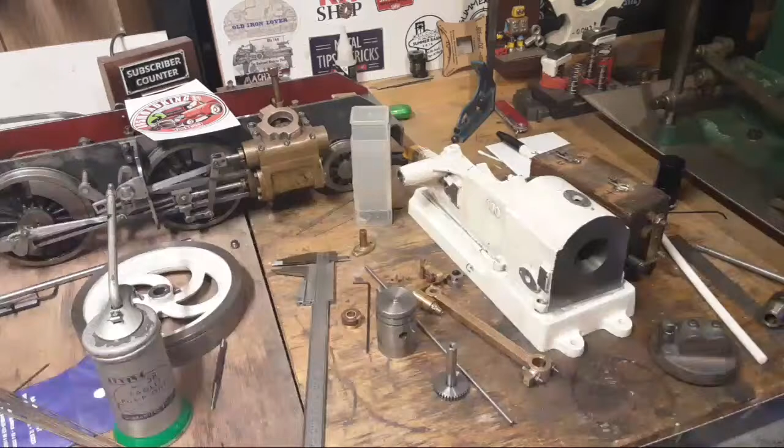Hey guys. Gosh, mixed crowd here.

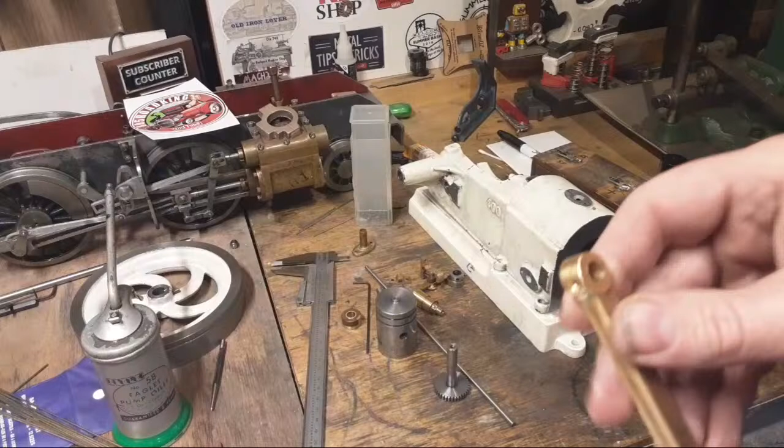Don't need a new conrod, no, probably need a new bush, that's about where we're at with that. Conrod should be fine, probably going to put a new bush in it. Joseph asks about the bush turning - that's a really good question. It's going to have a bit thicker bush than it's got here at the moment. So when it does, we're going to put a set screw in from the back here, just to lock it in place to stop it turning, I think, and locate it the same place every time and stop it moving sideways. So that's what I'm probably going to do, is put a set screw in there. This has got an oil hole in it this week, in the little end or the gudgeon.

And the new pin - the pin's finished. I actually made a pin which has got Teflon ends, one each end, to stop them marking if it does float, which I don't think it will, it's a pretty good fit in the piston, but if it does float, it'll stop it marking the bore on each end. So that's all we're going to do for wrist pin retention, I think, at this point.

Now this hole's oiled or lubricated through this one. It's got a hole in the top of the piston here which wipes past the hole for the oiler. It does actually line up, which I'm a little bit impressed about, but if you can see, in underneath there, as it wipes that should oil this, and it seems to work okay, so I'm fairly happy with that. That's where we're at with the state of play, really.

How did I do the Teflon ends? They're pressed in. This is just a bit of O1 or silver steel, and I machined each end and drilled it, then made Teflon ends a fraction oversized so they pressed in really nice and tight. Basically all I did was machine them down to a radius on the end, and I think they'll be plenty good.

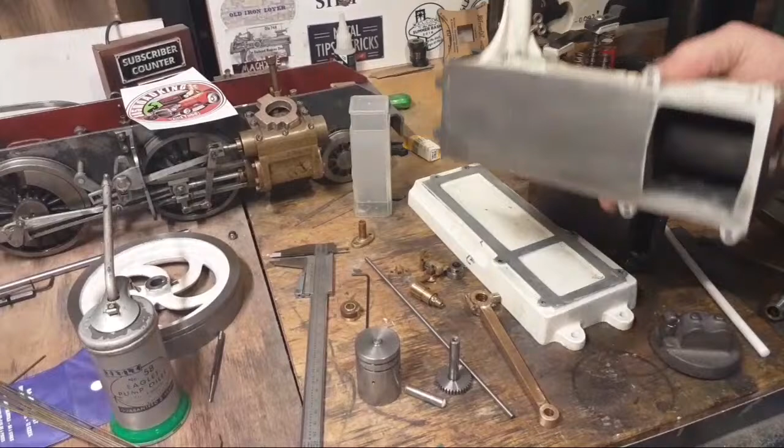There's the water jacket underneath for anyone who hasn't seen that. There's a water jacket hole there and a water jacket hole in the top, so there's pipes at the top which are going to go to a little radiator, I think, of some sort. This is solid all the way through here - I'm not sure if that was apparent to most people, but this is solid.

On this side we've got the crank and the bearing for the crank, which is straight in the cast iron, and the bearing for the cam, also straight in the cast iron. And we've got two points here, which is where the push rod mounts.

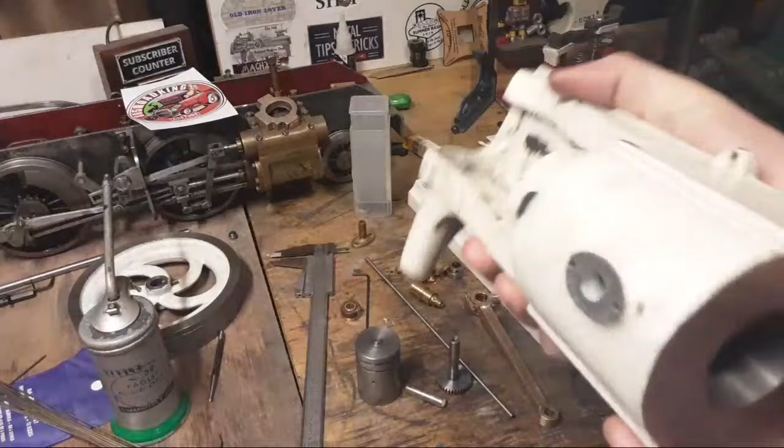This one's for the oiler up here. And if we have a look, there's the bore, which I'm pretty happy about, really. There's some oil streaks in there - I don't think it's actually scratches, I'm hoping it's not scratches. But I think it's just oil streaks there.

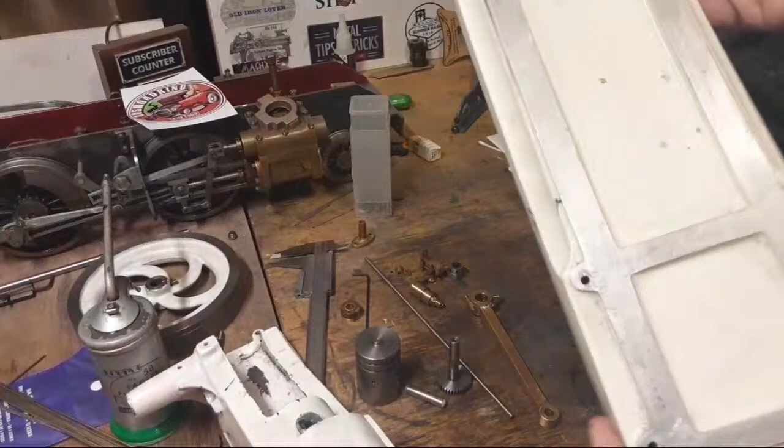That all sits on this casting, which is aluminium, because I couldn't be bothered shipping an iron one across, and I did this locally here.

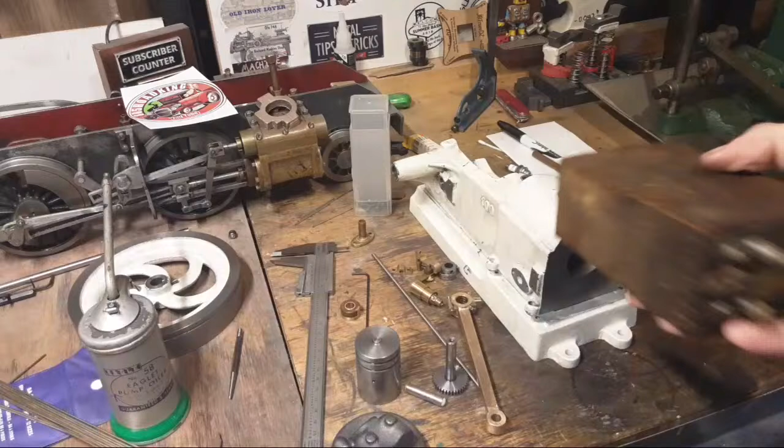It's got a funny rattle in this, which I don't like, but I'm hoping the wax hasn't dried out too much. But he sent a buzz coil, and he says it's all been tested and sorted, so...

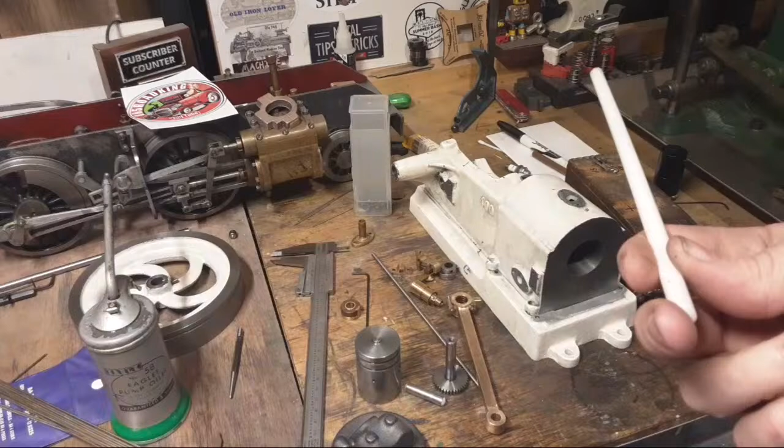Where did I source the Teflon from? Gosh, who had Teflon? Offcuts Galore in Sydney. I bought the material, which is 10mm O1 for the axles for the railway locomotive tender, and this came with it, so it wasn't very expensive.

Heat treat rings - good question. I'm not sure, there's two schools of thought on that. I'm still thinking that through, Joseph.

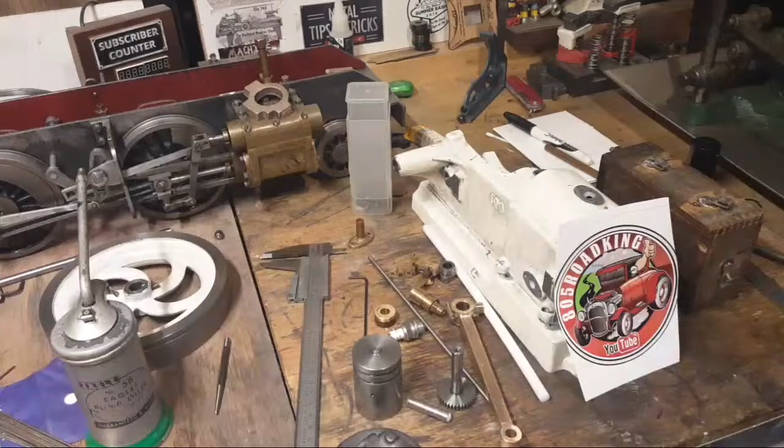He's got a pretty cool channel actually, I've been following him for a little while. So this is a pretty cool sticker - 805 Road King does a lot of messing around with engines and making custom stuff and that sort of thing. So it's a pretty cool channel.

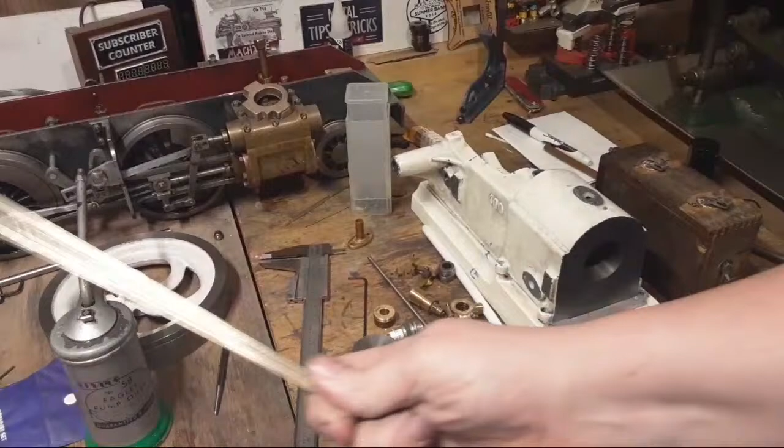Oh, what else has happened? Went shopping yesterday - oh yeah, Monday I went shopping. Bought some silver steel, so that's pretty exciting. Need silver steel, stocking up a bit in case we have to build a boiler for that over there at some point. What else to buy?

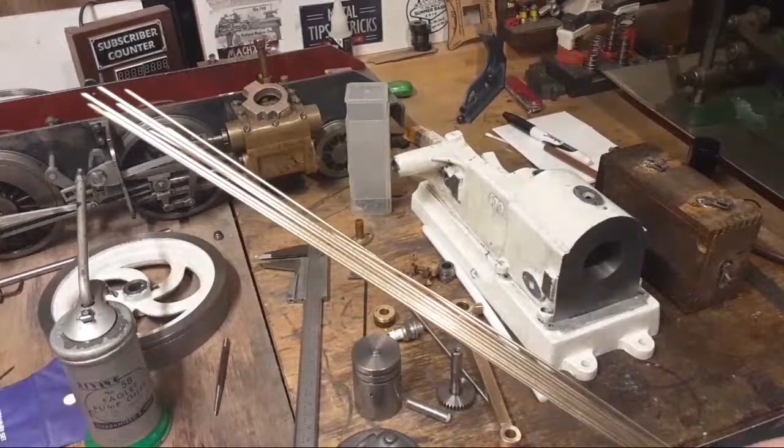How's it going? Chef Rex, check him out on Twitch, he streams on Twitch, Modern Engineering. Silver solder, 45%, that's almost impossible to get. But Actrol Parts in Australia, who do air conditioning supplies, they're the people to see about that. And it's cheap at the moment, silver's cheap at the moment. For some reason silver solder seems to be a lot cheaper than it was 12 months ago, not sure why.

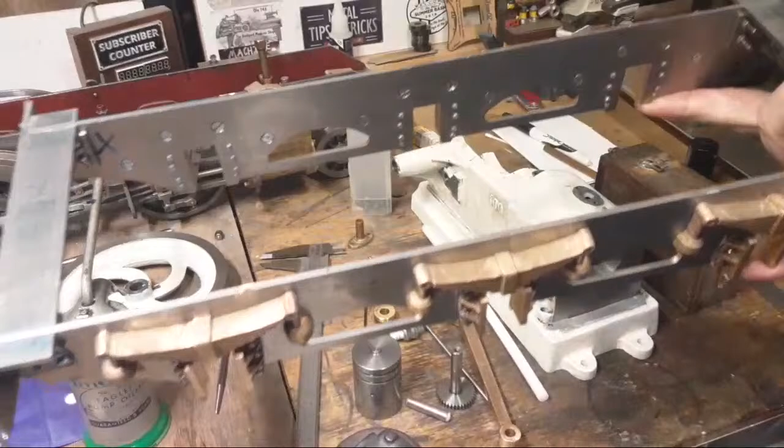How's it going? We've got a tender here, we're ready to start with wheels and axles now. We've got a new chuck on the lathe. This tender's starting to look reasonably good, got some riveting, got castings and bits on it. We've got front and rear buffer beams. Next is probably wheels and axles I think, and axle boxes. But I didn't want to start the wheels until I had reverse jaws for a 3-jaw chuck, and I've got that now. So at some point we might, but we're probably going to get some compression on this first.

What colour is the tip? I think it's gold tip, is it? Yellow tip, gold tip, I think, that's what they call that. 45%.

Yeah, I've got no idea either. It is a lot cheaper than it used to be. And it mustn't just be an Australian thing, because it seems like I only paid about 3/4 of the price I paid last time I bought solder. Not even, probably a bit over half, two thirds of the price. So that's a bit of a bargain, I thought. So I bought about $100 worth.

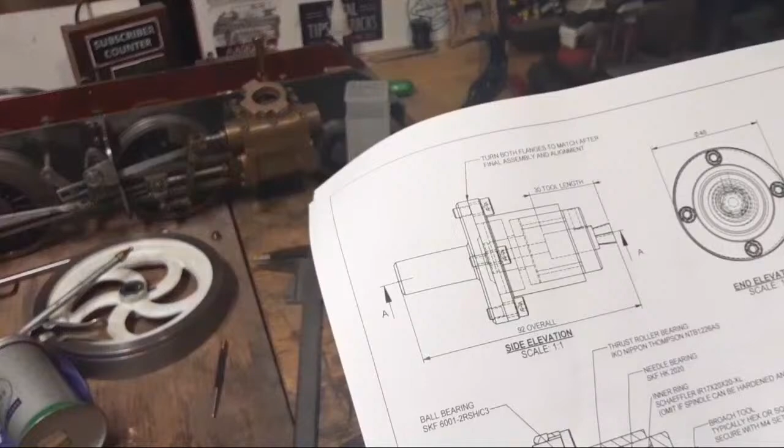What else? Oh, I went and bought this. Now, without trying to turn this into a Stefan Gotteswinter indicator sort of project, whereas we probably could, but I don't want to play favourites. But the people who did offer drawings for TMC 2020, I made these are for sale, so I'm not going to show them in detail. You can screenshot that if you like. I did make an effort to actually support those creators that were offering drawings. You probably should too - not playing favourites, but they are good drawings and they had excellent projects.

Who else made drawings? Nigel at Go Create Hobby Machine Shop. So, yeah, time to find out. Anyway, I printed some drawings. Anyway.

JB included 3D models, I've got to get a 3D printer again though. Take care, Mike, good to see you. Thanks for the update, Casual Steel.

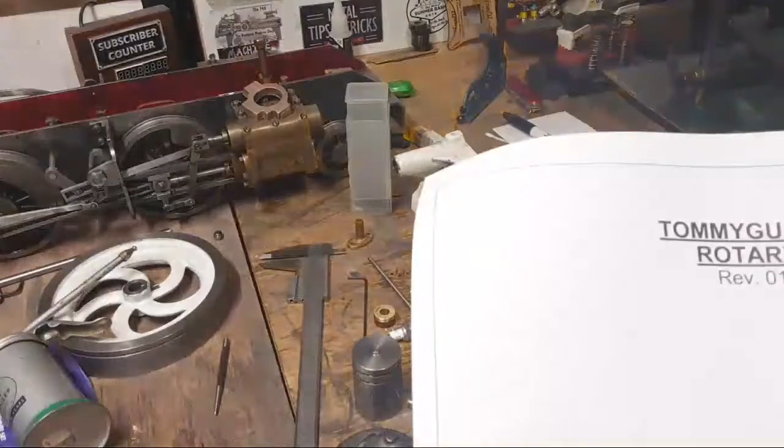These drawings are on the TMC 2020 video in the description for Tommy Gun Machining's entry on both videos I think. He's got these on Etsy and they're pretty good, everything looks fantastic on them. Pretty excited about that. The other ones were Nigel at Go Create for his floating reamer holder, and that looks good too, and that's another project that I'd like to make at some point, and I've got the drawings. So he wanted some cash for the privilege of downloading them, or some support, and I think that's pretty fair. Even if you just slip in $5, I think he'd be pretty happy with that, and I think they're worth it.

Full set of prints, yeah well that's cool JB. JB's done it too, so if you want to make a pretty awesome looking little benchtop laser engraver or laser cutter, that might be pretty awesome as well.

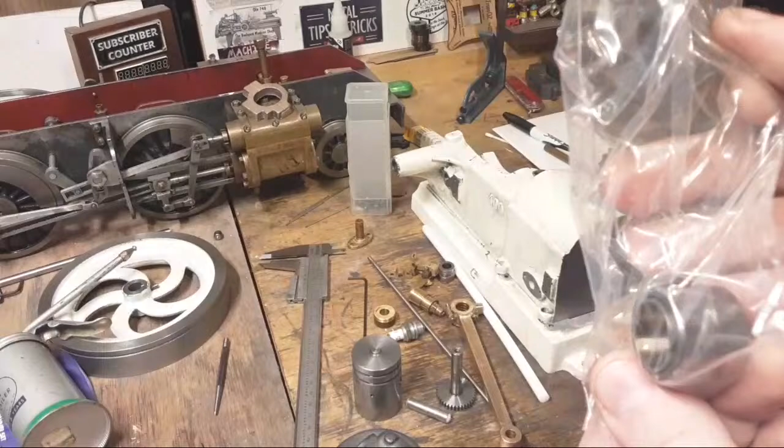Anyway, bought the bearings. Looking at these, they look fairly expensive and fairly hard to get. There's a roller bearing, and that's what I was sort of worried about. I went and got prices because I was thinking, gosh, I bet they're expensive. So there's a needle roller and an inner to save you hardening and grinding the race for it.

And there's, I think it's an angular contact sort of deep groove ball bearing there.

Anyway, everyone wants to know, what are the bearings worth? Well, my local supplier had them in stock, so there's no excuses now. I'm probably not going to get to it anytime very quickly, but I've got the bits there in case I find a bit of stock that might work for it. $28 Australian for the complete set, so that's pretty reasonable.

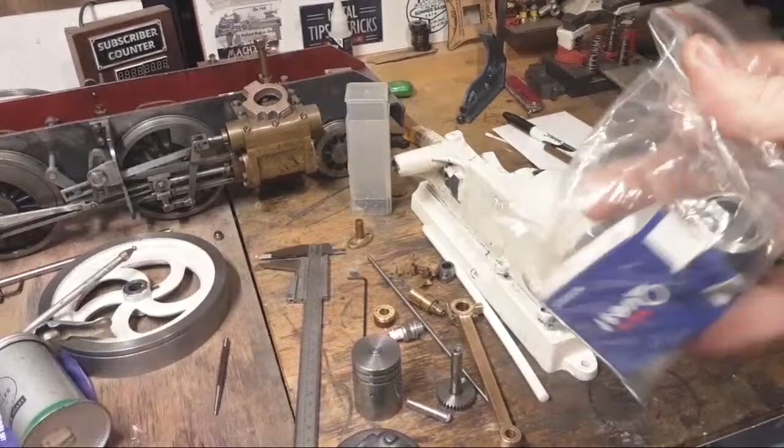Yes, we have a local bearing supplier and a local bolt supplier. They're next door to each other, and they're pretty helpful with most things. I thought that was pretty common, actually. Okay, anyway, they had those in stock, which I was pretty impressed about. I think they had 4 inners and 7 outers, and a dozen of those in stock, and they were $28 Australian, which is about $16, $17, $18 US, something like that. Not even $16 US, so it's a good little project without a lot of outlay.

There's a lump of 4140. Hit up Man Cave for that, and you're away.

And there's only, I think there's 3 bits in it. So there's 3 fairly precise machining parts and some interesting setups. But apart from that, it's a pretty easy build.

What diameter is needed? Really good question. 48, so 50 mil roughly. There you go. 48 diameter and 48 diameter. I think you've got to have 2 bits 48 and 1 bit... Gosh, just reading this drawing, terrible, difficult to read. No, they're really good drawings actually. And 1 bit 26. So 2 bits 48 that are only...

Anyway, there we go. So that's what's happening here. The other big thing here, can we show the first 2 pages? I guess so. There's page 1. Page 2, no dimensions on that either. But that's how it goes together. It's pretty straightforward. There's the 3 parts: the spindle, and the body, and a back plate which has got the angle on it.

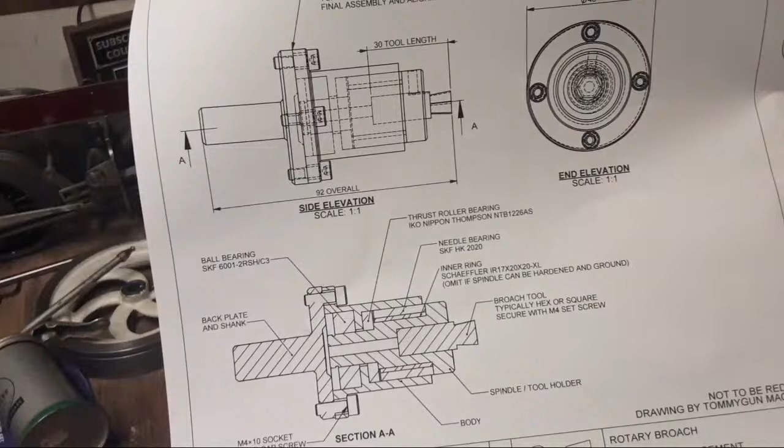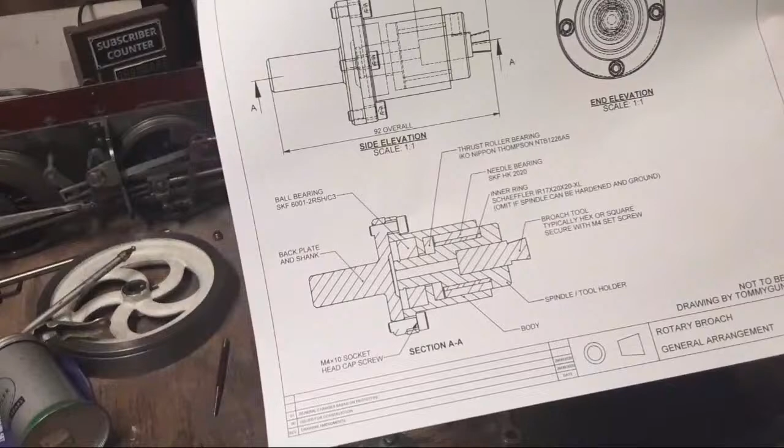It's got a cutter in the front there. It's held together with cap screws, M4 cap screws. And it's got a shank to go in a chuck. I think mine will probably have a Lorch taper on mine. That might be a good thing to do to minimise overhang. And it's got a bearing inner and outer, and 2 bearings in it.

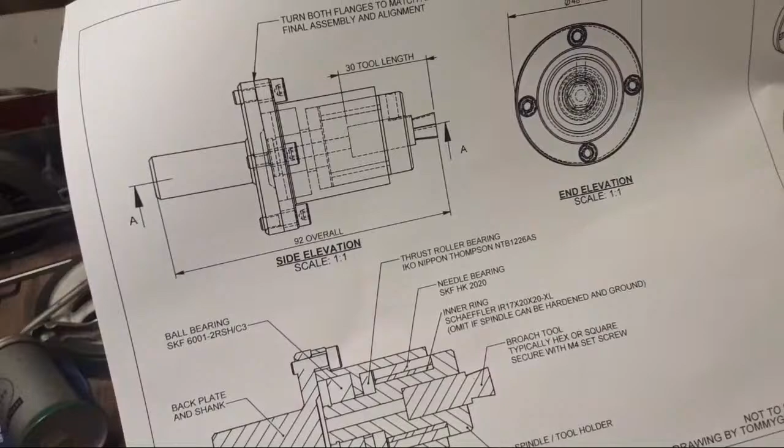So it's fairly compact design. It's only 92 millimeters, about, what would be about 50 millimeters, something like that, to the back of the back plate. So it's not a bad thing. I'm a little bit impressed with it.

Got the drawings too for the floating reamer holder from Go Create. That's a nice build as well. It does show the overall diameter. Here, 48 millimeters is the overall diameter and 92 overall length. So there we go.